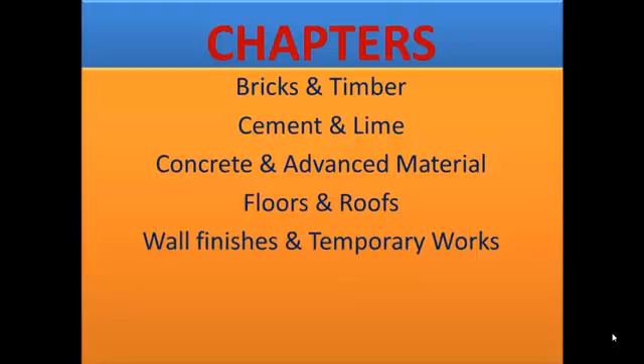The whole syllabus has been divided into 5 headings based on different types of materials used. The headings are bricks and timber, cement and lime, concrete and advanced materials, floors and roofs, which is based on construction, and finally finishes and temporary works. So let's start with the first chapter, bricks and timber.

First, let's discuss what bricks are. Bricks are considered the basic building blocks of all constructions. Bricks have been used since ancient times as a construction material, be it the ancient Egyptian civilization or the Indus Valley civilization, making it the most practiced and abundantly used building material.

Bricks are defined as structural building blocks or units of clay, made by molding the clay, then drying and finally burning it. Now, a question arises: there are many kinds of materials available, so why are bricks so abundantly used? This is attributed to a number of factors, like availability of clay, which is a universal material, unlike stones which require quarrying, or concrete which requires different processes before being used as a construction material.

Another important factor is size, shape and handling. Bricks have a convenient size and shape, as clay can be molded into the desired shape, the standard size being 19 by 9 by 9 centimeters. Bricks are also cheaper compared to stone masonry or concrete, and there is no requirement of any shuttering like in concrete.

Bricks are obtained by molding clay into rectangular blocks of uniform size, then drying and burning these blocks. As bricks are of uniform size, they can be properly arranged. They are also light in weight, and hence bricks replace stones.

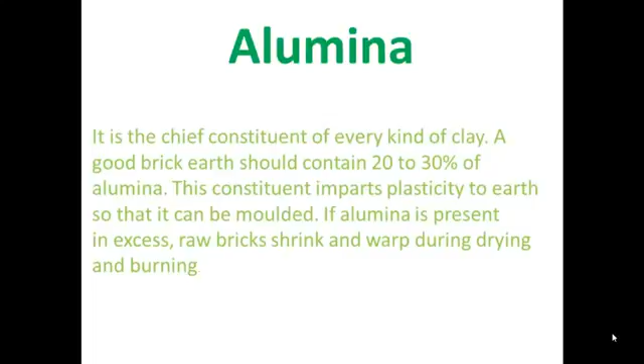First, the alumina content. It is responsible for giving the clay its plastic character during molding. When alumina is higher than 30%, the brick becomes more plastic and shrinks more on drying, which develops cracks, which is undesirable. If alumina is less than 20%, the clay may be difficult to mold and may not give a proper shape. Hence, the alumina content should be between 20 to 30%. This constituent imparts plasticity to the earth so it can be molded.

Then we have silica content. Silica is responsible for imparting hardness and strength to the brick, and it provides resistance against shrinkage. However, when there is an exceptionally higher content of silica, the brick may not be moldable, and it may develop pores. The mean silica content present should be 50 to 60%.

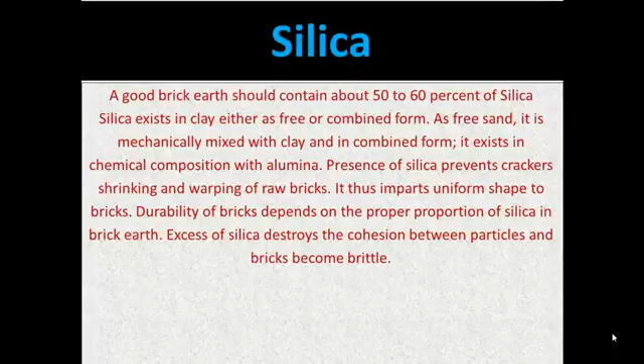Then we have another important constituent, lime, which should be present from 4 to 6%. A small quantity of lime is desirable in a finely powdered state, as it prevents shrinkage of raw bricks.

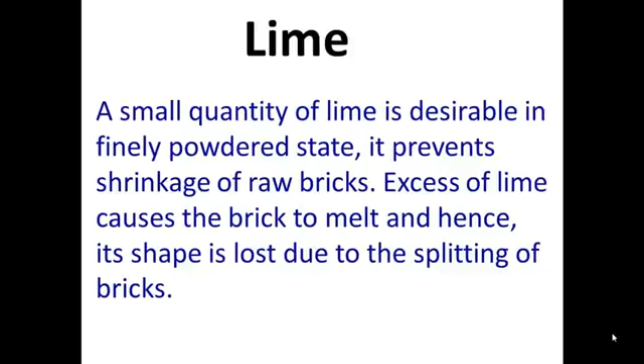Now, oxides of iron. A small quantity of iron oxide, to the extent of 5 to 6%, is desirable in a good brick to impart red color to the bricks and to lower the softening temperature of silica during firing. Excess of iron oxide is undesirable, as it deforms the shape of the brick and may even make it acquire a darker shade. A deficiency of iron oxide makes brick burning difficult and gives it a yellowish color, which is undesirable.

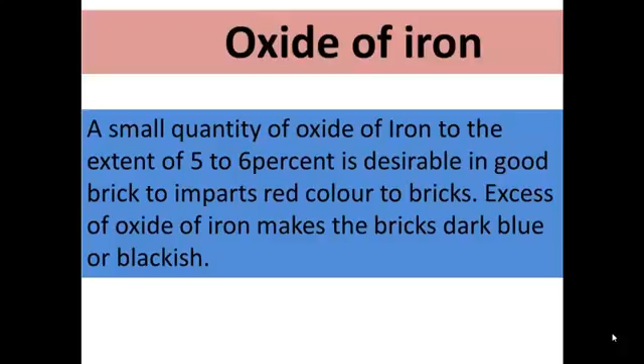Now let's talk about magnesia. A small quantity of magnesia in brick earth imparts a yellow tint to the bricks and decreases shrinkage. But an excess of magnesia leads to the decay of the bricks.

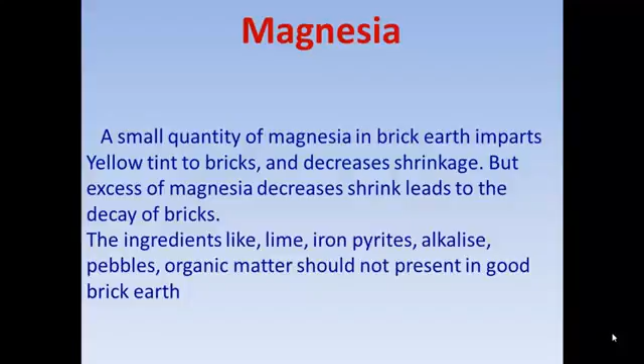Now, what should be the characteristics of good bricks? First, let's talk about the physical characteristics, then we have the mechanical characteristics as well. The physical characteristics include the shape, size, color, and density of the brick.

The shape of the brick is truly rectangular with well-defined edges and corners. In India, the recommended size of an ideal brick is 19 by 9 by 9 centimeters, which with mortar joint gives a net dimension of 20 by 10 by 10 centimeters. 500 such bricks will be required for completing 1 cubic meter of brick masonry.

Recommended sizes of less common use are also available, but they are not so important in India as they are used in other countries. A 22 by 10.5 by 7 centimeter brick can also be used.

Now what should be the characteristics? The brick should be table molded, well burnt in kilns, copper colored, free from cracks, and with sharp and square edges. Bricks should be of uniform shape and standard size.

Bricks should give a clear ringing sound when struck against each other. If we strike two bricks against each other, they should give a sharp ringing sound, a metallic sound, not a dull sound.

The most common color of building bricks is red, varying from deep red to purple. A very dark shade indicates overburning, and a yellow shade indicates underburning of the bricks.

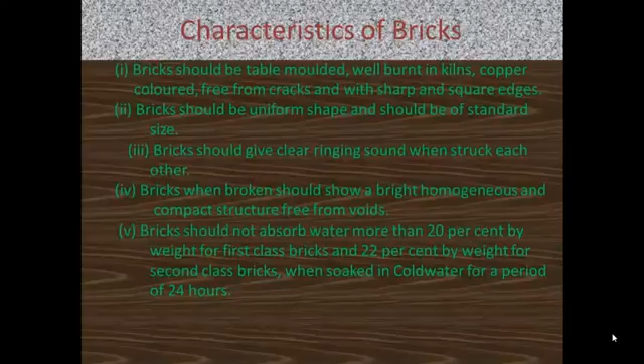Bricks should be sufficiently hard. No impression should be left on the brick surface when it is scratched with a fingernail.

Bricks should be of low thermal conductivity and should also be soundproof. For that, we can use hollow bricks as well.

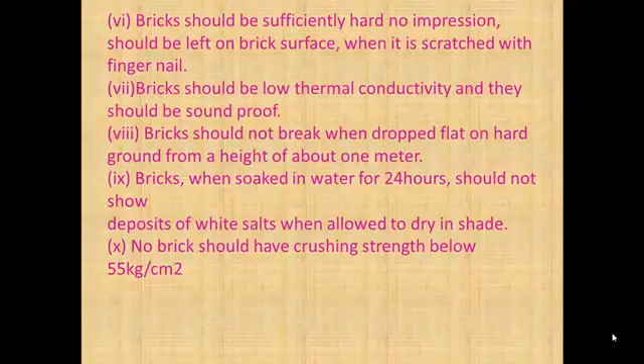Bricks should also not break when dropped flat on hard ground from a height of about 1 meter, and when soaked for 24 hours in water, they should not show deposits of white salt, which is called efflorescence. Bricks should have a crushing strength of about 55 kg per square centimeter.

There are standard tests conducted as per IS 1077-1970 on bricks, and the most important tests include the compressive strength test and the water absorption test. Let's first talk about the water absorption test.

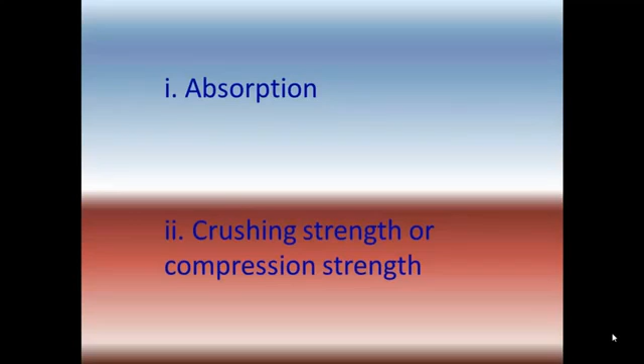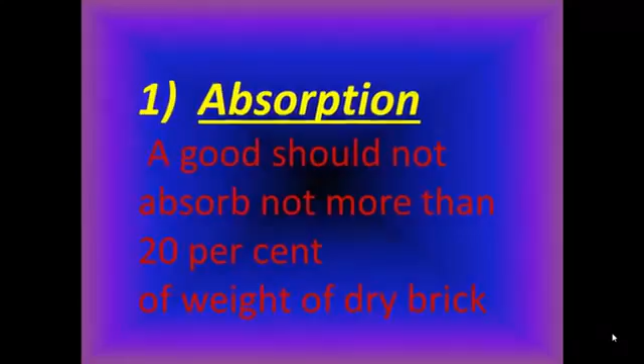According to IS 1077-1970, there's a procedure for conducting this absorption test. We take 5 bricks at random and dry the sample to a constant weight in a ventilated oven at 110 degrees centigrade for 48 hours.

The specimens are weighed individually after cooling, and the dry weighed samples are then immersed in water at room temperature for 24 hours. After 24 hours, the samples are taken out, and each sample is weighed within 3 minutes after being taken away from the water.

The absorption is given by W2 minus W1 divided by W1 into 100, where W1 is the dry weight and W2 is the weight after immersion in water. The mean of the 5 values is taken as the percentage of water absorption.

Then we have the compressive strength or crushing strength test. We take 5 bricks at random and immerse them in water for 24 hours. After 24 hours, they are taken out and their frogs are filled. A frog is a depression on the brick where the numbering of the brick may be written.

After 24 hours, they are taken out and the frogs are filled with 1:1 mortar. 1:1 means we take one volume of sand and one volume of cement. These bricks are then covered with a sack for 24 hours.

The bricks are taken out, covered by 2 plywood sheets, and then directly tested on a UTM (universal testing machine) or CTM (compressive testing machine). The load is applied at a uniform rate of 140 kg per centimeter square per minute. The load at which the brick breaks is divided by the area of the cross section, giving the compressive strength, and the arithmetic mean is calculated for 5 bricks to give the standard compressive strength of a brick.

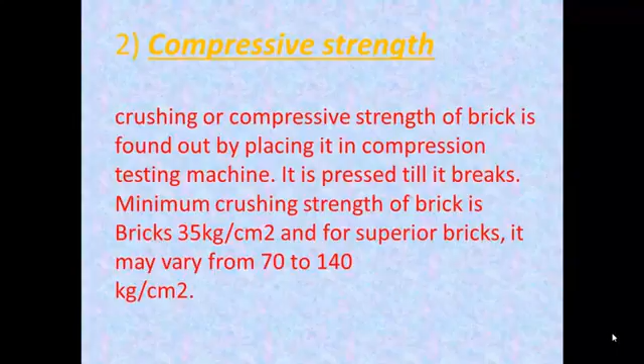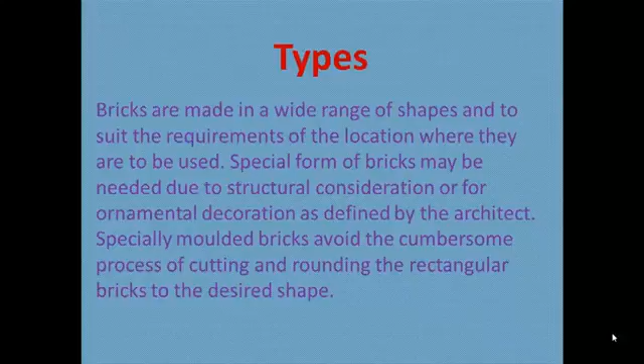Different types of bricks are used, including special types. Bricks are made in a wide range of shapes to suit the requirements of the location where they are to be used, for example in coping, walls, or partition walls. Special forms of bricks may be needed due to structural considerations or ornamental decoration as defined by the architect. Specially molded bricks avoid the cumbersome process of cutting and rounding rectangular bricks to a desired shape.

Now we have different kinds of bricks. First we have squint bricks, we may have perforated bricks, hollow bricks, and channel bricks. What are squint bricks? These bricks are made in a variety of shapes and are used in the construction of acute and obtuse squint quoins.

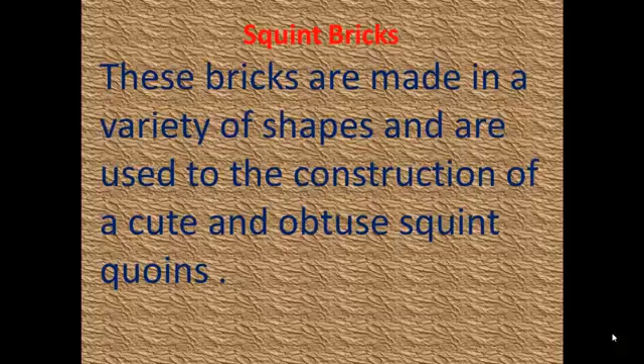Then we have the bullnose bricks. Bullnose bricks are also used. These bricks are used to form round quoins.

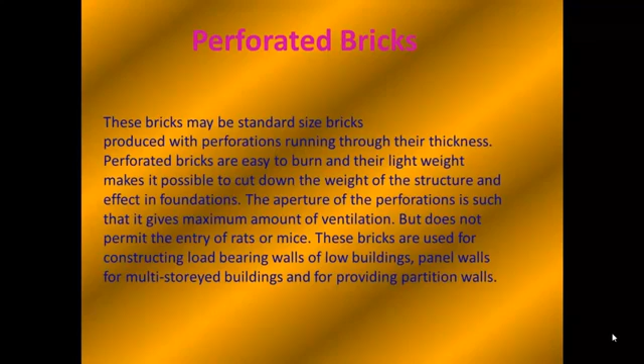Then we have perforated bricks. In these bricks, cylindrical, rounded, or rectangular holes are made in the brick after the molding stage, called perforations. These are properly placed at a distance of 15 mm from the side of the brick, and the distance between any two perforations shall not be less than 10 mm. The major advantage is that they are light in weight, less clay is required due to the perforations, and they have the least efflorescence.

Then we have another type, the hollow brick. They are also called cellular or cavity bricks, and their weight is almost 1/2 or 1/3 of a solid brick. These bricks are made of clay and provided with one or more cavities. Hollow bricks are light in weight and are used to increase insulation against heat and dampness, because they are hollow from inside.

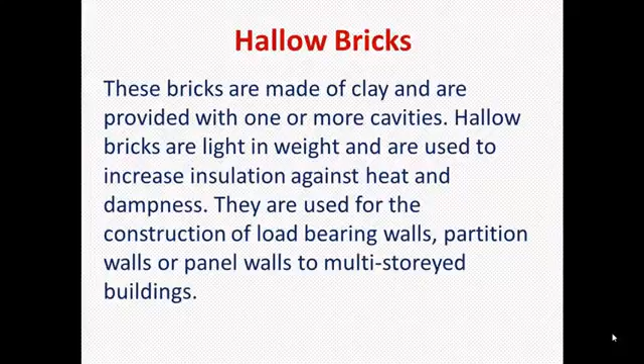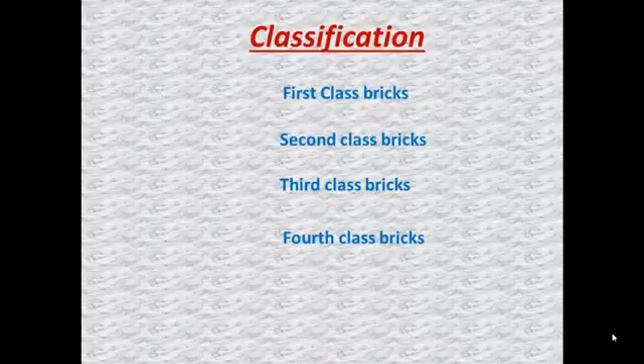Then we have the classification of bricks. Bricks have been classified into 4 classes based on different characteristics: first class bricks, second class bricks, third class bricks, and fourth class bricks.

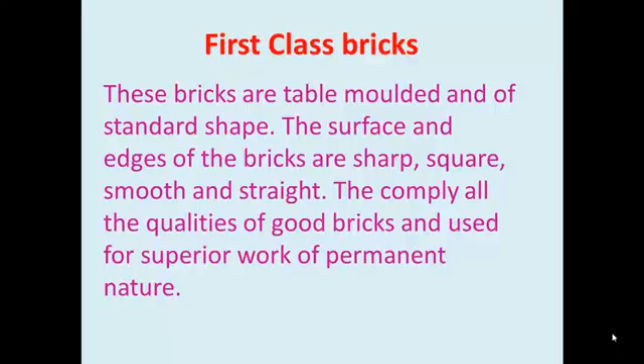First class bricks are well burnt with an even surface and rectangular shape. Compressive strength shall not be less than 140 kg per centimeter square, and absorption after 24 hours shall not exceed 20%. When two bricks are struck together, a ringing sound should be produced.

Second class bricks are well burnt, and even slight overburning is acceptable. A metallic ring should be produced when two bricks are struck together, and the surface may be slightly uneven. Compressive strength should not be less than 70 kg per centimeter square, absorption should be from 20 to 22%, and slight fractures are admissible.

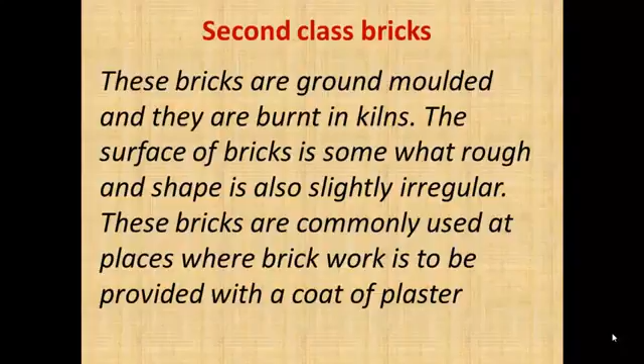Then we have third class bricks. They are poorly and unevenly burnt, and may even be overburnt or underburnt. On striking, a dull sound may be produced, with a non-uniform or irregular appearance.

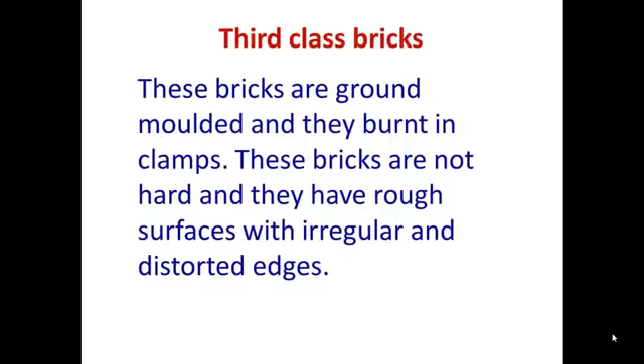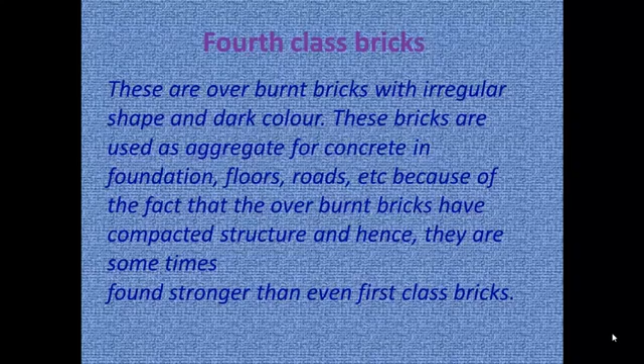Then we have fourth class bricks. They are irregular in shape and dark in color, with compressive strength of about 150 kg per centimeter square, which is unacceptable for normal use. They are used basically in foundations, where a large amount of load comes from the structure above.